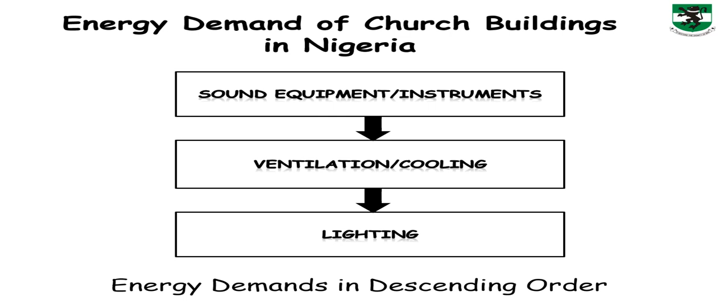Energy demand of the church buildings in Nigeria showed that the sound equipment and instruments consumed the bulk of the energy supply, followed by the ventilation and cooling, and then the lighting demand. Now, let's go into the detailed discussion of the eQuest simulation results.

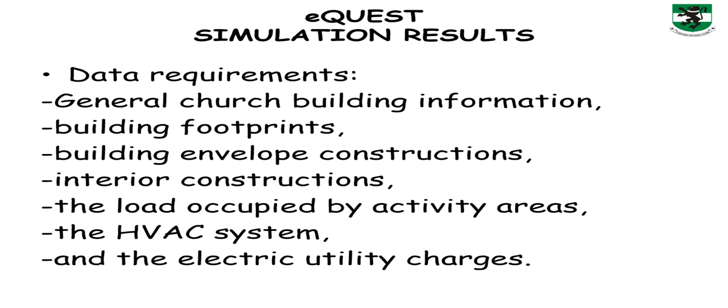Now, the data requirements for the eQuest simulation included general church building information, building footprints, building envelope constructions, interior constructions, the load occupied by activity areas, the HVAC system, that's the heating, ventilation, and air conditioning system, and the electric utility charges.

Now, at this point, it's important for us to understand that 14 church buildings were surveyed for this research. But for the purpose of this presentation and for the paper presentation, we picked two of the church buildings to discuss, which is the Seventh-day Adventist church building that had no air conditioning systems, and the Redeemed Christian Church of God church building with air conditioning systems.

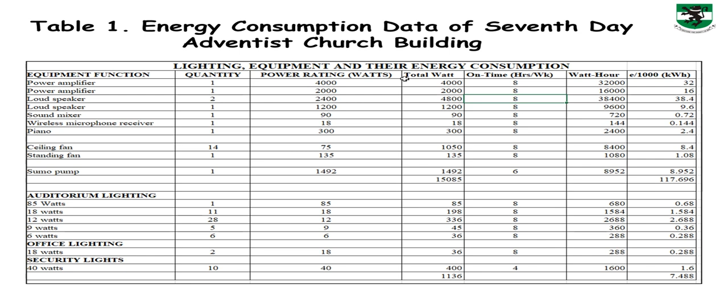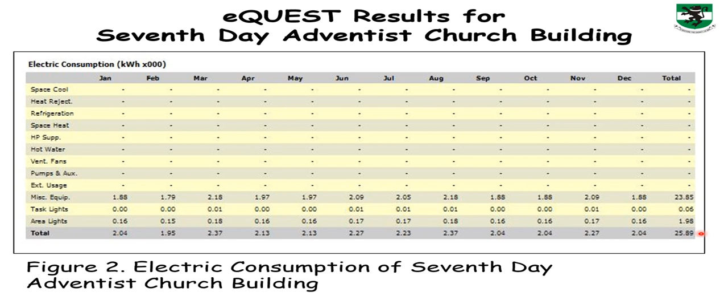So right here you have the energy consumption data for the Seventh-day Adventist church building. Here we took data for the power amplifiers, the loudspeaker, wireless, and the lightings and all those electronic equipment and their sound instruments. On inputting the data into the eQuest simulation software, we got this as the baseline result. Here you have the plug loads represented as miscellaneous equipment, and here you have the area lighting. There was no space cooling, so that is why this graph looks like this.

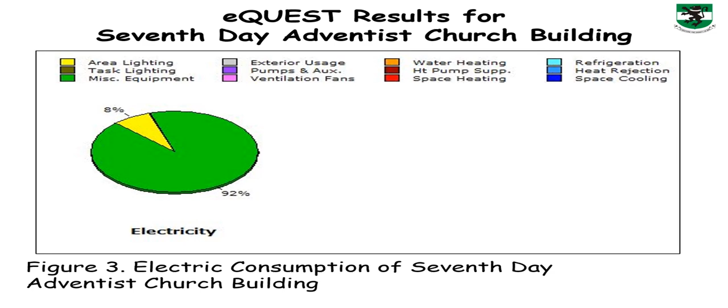Here you have that the total kilowatt hour was 25.89 kilowatt hour from January to December. This pie chart here shows that the plug loads took 92% of the total generated energy, while the area lighting took 8% of the remaining energy.

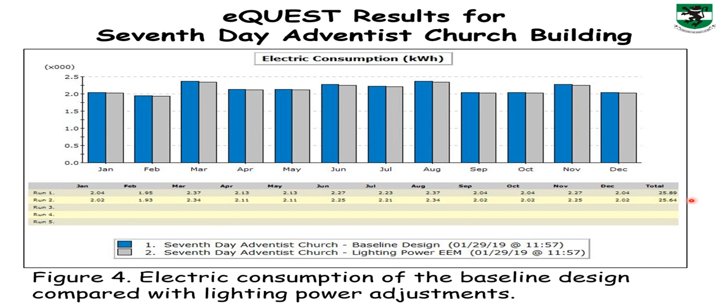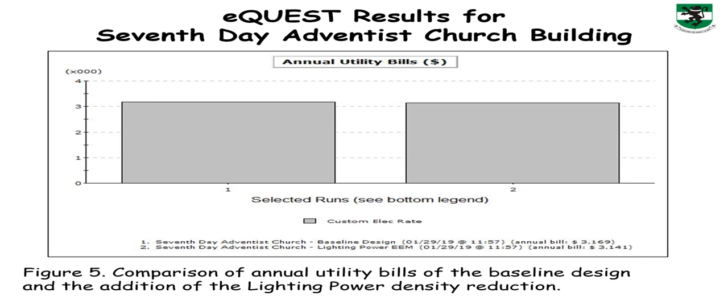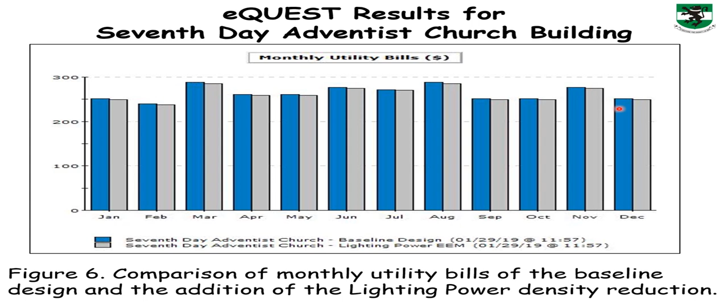Now, when we did the first simulation, which was to reduce the lighting power density, we had that the total energy reduced from 25.89 kilowatt hour to 25.64 kilowatt hour, which is very little reduction in the energy consumption. In the annual utility bills, we can also see this decrease, very little also, from $3,169 to $3,141. No significant change there.

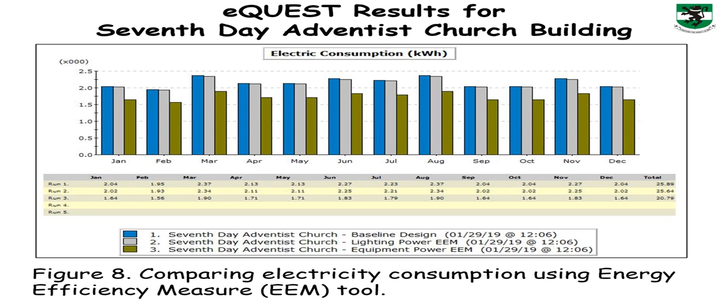But on the second simulation, which was to reduce the equipment power intensity, we saw significant reduction. Even from the graph, you can see that for the first simulation, little or no change here, but on the second simulation, which was to reduce the electric power intensity or equipment power intensity, we can see significant change here, from 25.89 kilowatt hour to 20.79 kilowatt hour, which is about 5 kilowatt hour reduction in energy consumption.

Now, this is the Redeemed Christian Church of God.

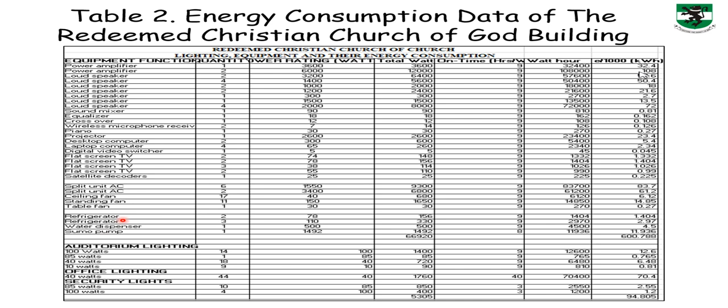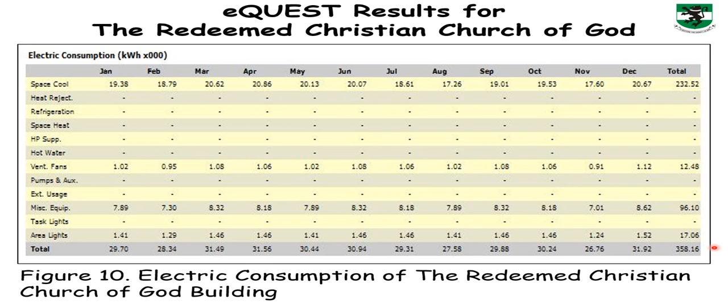These are the consumption data that we took for the Redeemed Christian Church of God. The same thing, just that for this very church building, we had split ACs, and we also had a refrigerator involved. Now, after we inputted all the data into eQUEST software for simulation, this is the baseline output that we got. As we can see, this is for the space cooling, and then this is for the plug loads, while the yellow area here is for the area lighting, and the pink area here is for the ventilation fans.

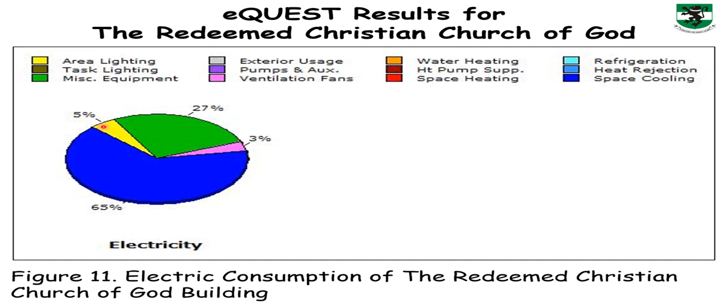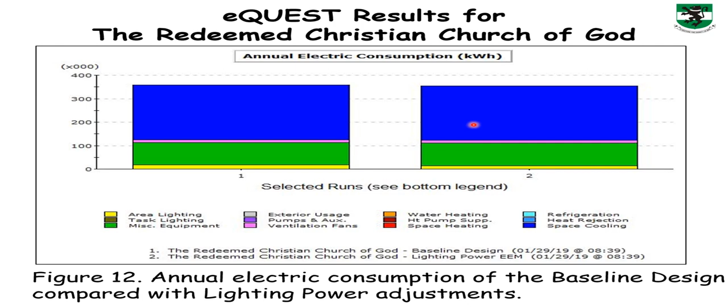Now, total electric consumption was 358.16 kilowatt hour. So the bulk of that energy was consumed by space cooling, and 27% of that was consumed by the plug loads, while 5% was taken for the area lighting and 3% was taken for the ventilation fan.

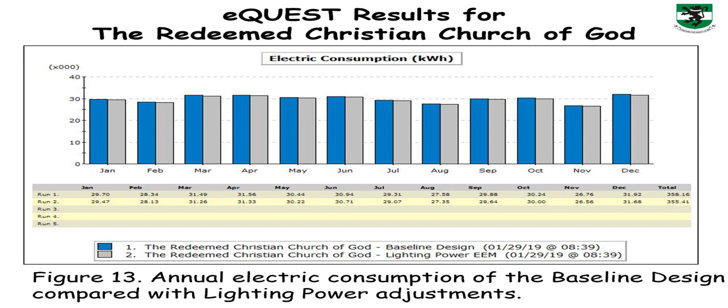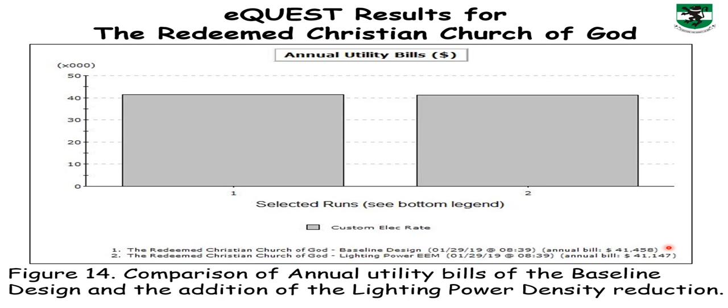Here we can see on the first simulation, which was to reduce the lighting power intensity, we had little or no change, as you can see from the graph here. Still the same thing here for the electric consumption. We can see little or no change. We can see that here it was 358.16 kilowatt hour, and after the first simulation, we now had 355.41, which is just a 3 kilowatt hour reduction in energy consumption.

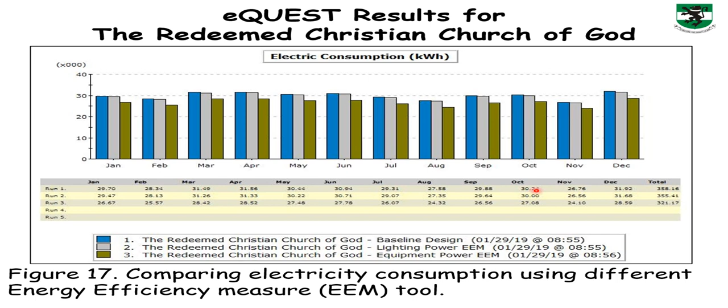But here on the second simulation, which was to reduce the equipment power density, it is obvious that there is significant change, as you can see here, from 358.16 kilowatt hour to 321.17 kilowatt hour. Even on the graph, it's obvious here. On the first simulation, little or no change, but on the second, we can see a lot of changes here. We can see significant change here and all that.

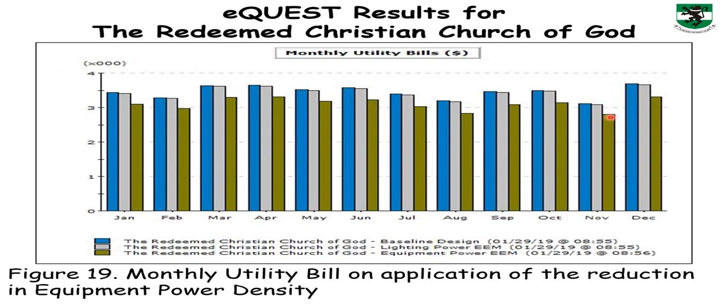Even in the annual utility bills, we can see that there's significant change also in the cost of energy consumption. We can see from $41,458, we now have the cost reduced to $37,027, which is very significant.

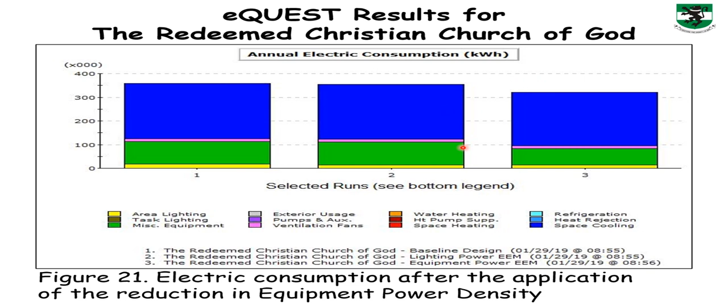Now we can see the monthly bills also have been affected. We can see the reduction there. Here we can see reduction, we can see reduction here, we can also see reduction here at the space cooling. And here also, it's very obvious, annual electric consumption, we can see no significant reduction here, but very significant reduction here. Now to the conclusion.

We discovered that some of the factors responsible for the current energy performance of the church buildings were the use of fossil fuel generators as a last resort for energy generation by churches due to the epileptic supply of power from the national grid. Also, the absence of energy codes and regulatory policies on the energy consumption and performance of church buildings was a factor. And then poor management of generated electricity by the church management and members of the respective churches also accounted for this.

Then another factor was the lack of awareness of the church body in Nigeria as a whole towards the mitigation concerns for these greenhouse gas emissions and their green alternatives such as the popular solar power.

In conclusion, an average church building in Nigeria relies heavily on the use of fossil fuel generators as a major source for self-generated electricity. On average, according to the eQUEST software, church buildings in Nigeria consume between 25 kilowatt hour and 358 kilowatt hour of energy annually, a range of values that depends on the church's dynamic facility needs. We conclude that green energy alternatives, the more cost-effective alternatives, will definitely reduce the energy consumption in church buildings in Nigeria.